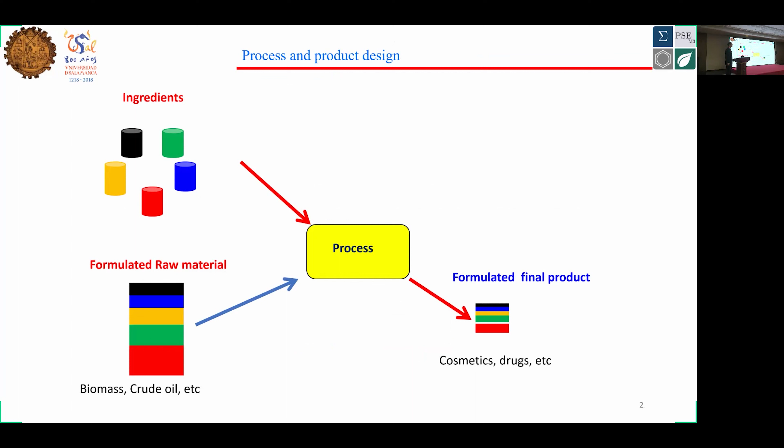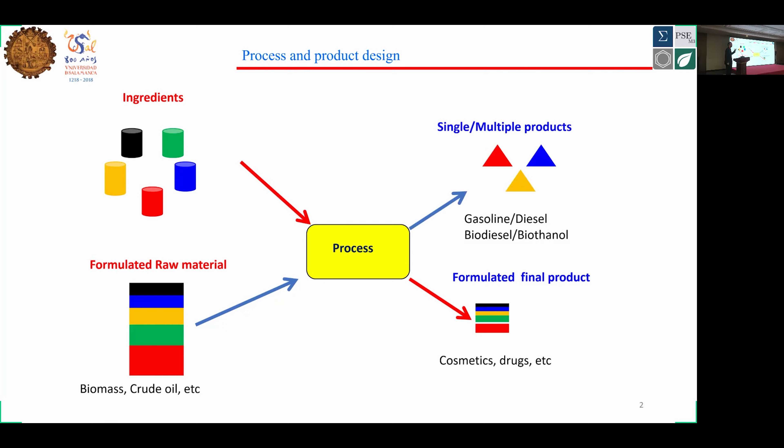Basically, we can talk about two different kinds of products. One is made from mixing a number of ingredients, that's basically what you have anytime you buy shampoo, a perfume, or cosmetics. Or thinking reversely, you have biomass, you have crude, which is made of a number of ingredients, and in the end we are going to separate them to get final products.

So we are going to present three cases, three examples, for these different formulated products. The first one, the formulated product is biomass. We are going to see how we can design the biomass depending on the final products or even the cost of the market of those products. The second example is a little bit more related to energy: the selection of a heat transfer fluid for the operation of an organic Rankine cycle.

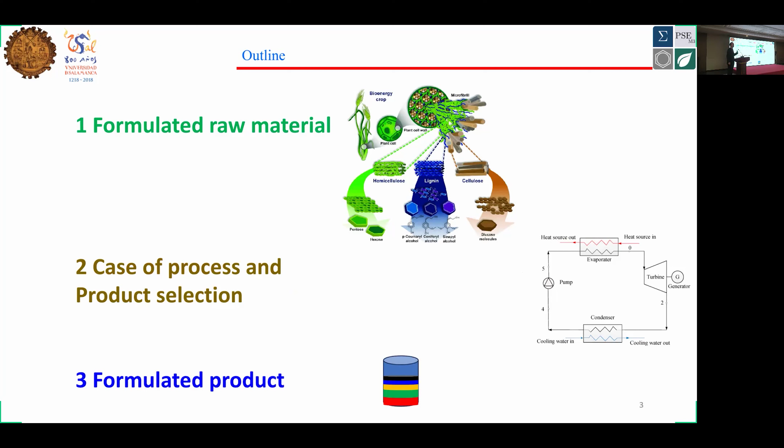The third one is a formulated product made by mixing a number of ingredients, and it is where the supply chain is going to be considered. This first example is related to a biorefinery. The idea is biomasses are made of a number of ingredients like cellulose, hemicellulose, lignin. If we talk about algae, we have lipids, carbohydrates, and so on.

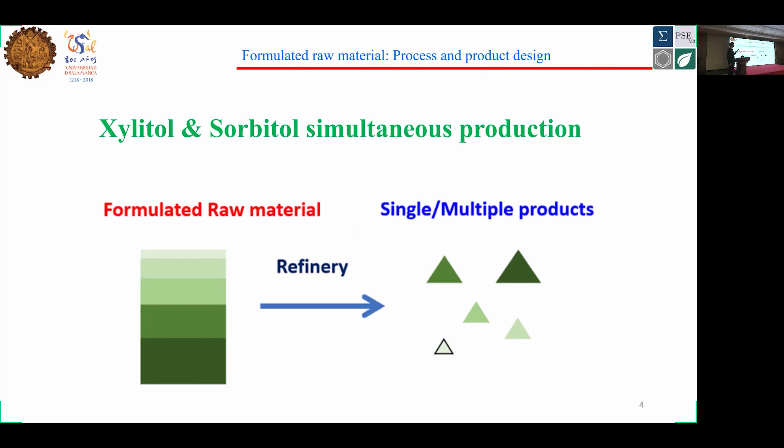We are going to separate them. For this particular case, we have two different products, xylitol and sorbitol, and the price in the market is different. While xylitol comes from C5 sugars, sorbitol comes from C6 sugars. So, on the one hand, we have to select the technologies to process the biomass—pretreatment, fermentation, or catalysis for the synthesis and purification—and on the other hand, we can play with the composition of the biomass.

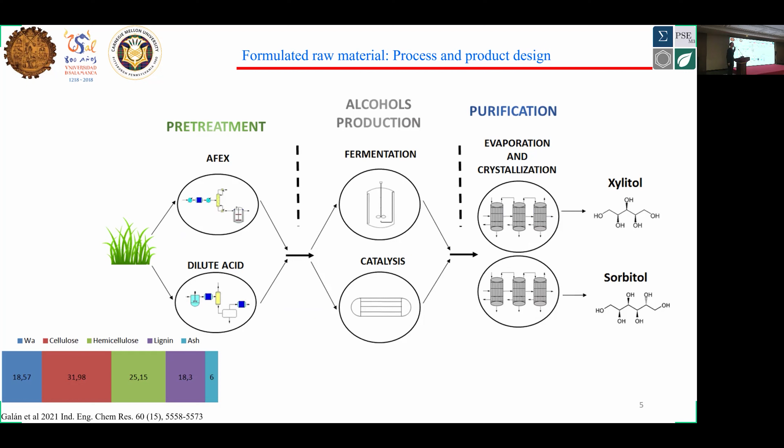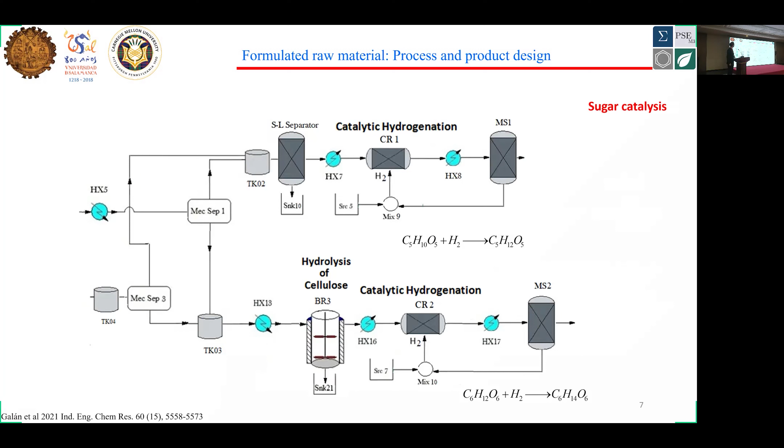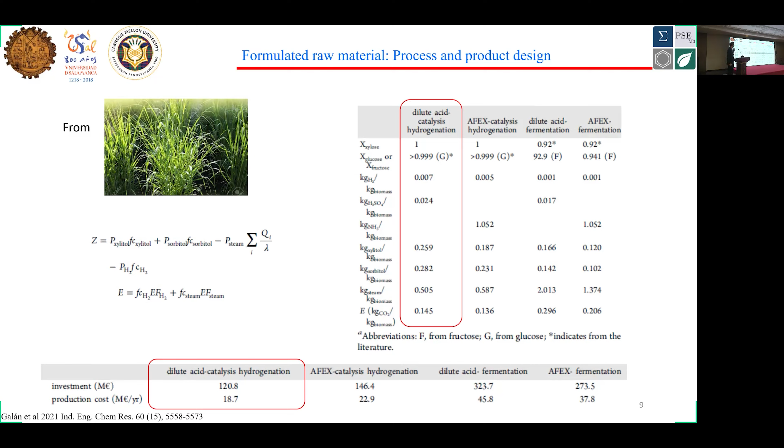So the idea is that first, in process design, we are going to select the technologies, and for that we basically solve this superstructure, and we see that dilute acid followed by catalytic hydrogenation is the best one. But the thing is that you have a number of waste biomasses available—residues from the forest, residues from harvesting, and so on.

The first problem can be to minimize the production cost of that facility. For that, depending on the initial biomass, depending on the raw material and so on, you find different costs. The best one turned out to be corn stover.

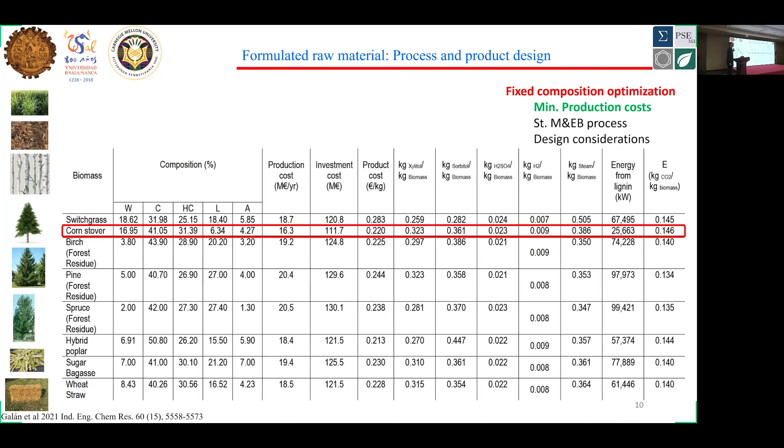We can think of the problem differently. Because of the different price of xylitol and sorbitol, we can have a biomass that we engineer for the composition—xylitol is more expensive than sorbitol. If we optimize the profit, we get a biomass that requires around 40% hemicellulose.

That biomass—the closest that we can find is something like sargassum algae. You see that the production cost is closer to switchgrass, but a little higher than corn stover. So basically that biomass maybe cannot be produced. That's why we try to find something available in nature, but otherwise we can try to engineer one with 40% cellulose, hemicellulose, 20% cellulose.

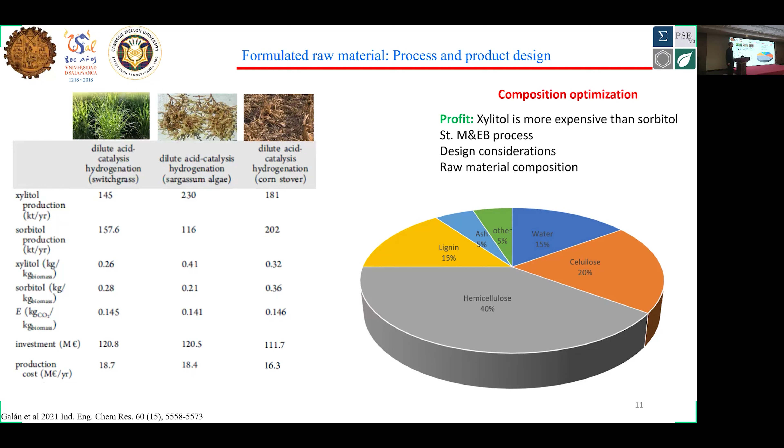Another example is related to the selection of heat transfer fluid. Basically here, the problem that we have is these fluids are toxic and flammable, and also depending on the thermodynamics, they generate more or less power.

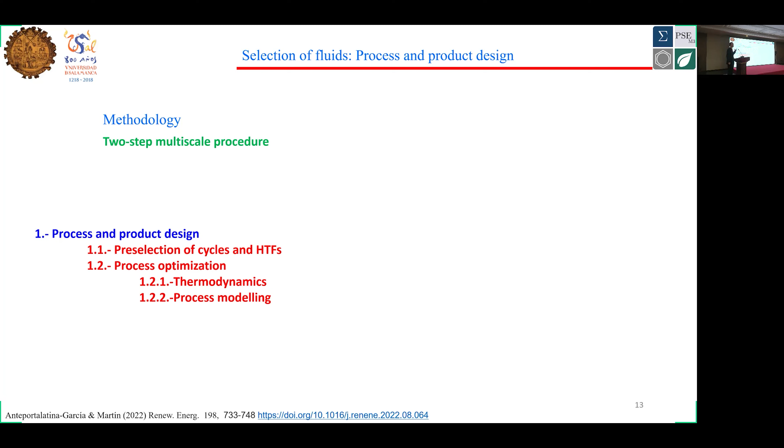So we develop and propose a two-step methodology. The first one, because of the number of heat transfer fluids that can be used, is kind of a pre-screening. The pre-screening will somehow reduce the number of alternatives in terms of fluids and in terms of cycles. The cycles depend on the layout and the type—we'll see the example later. We can also select the type of facility depending on the availability of the resource.

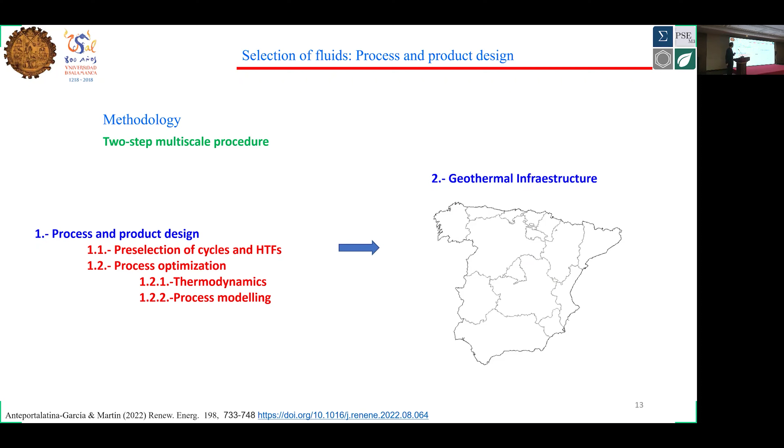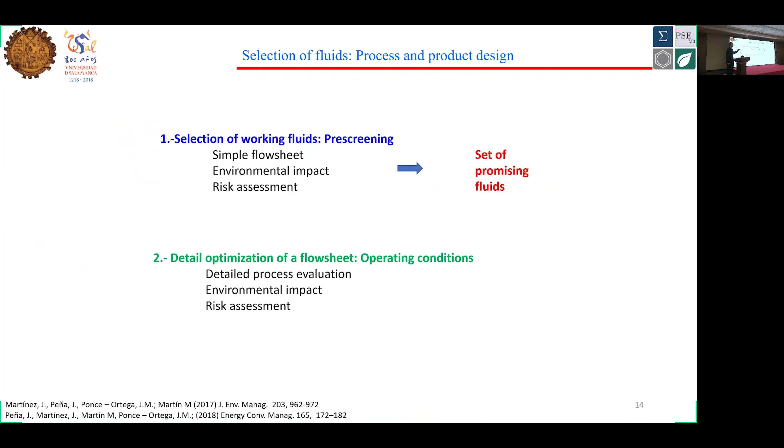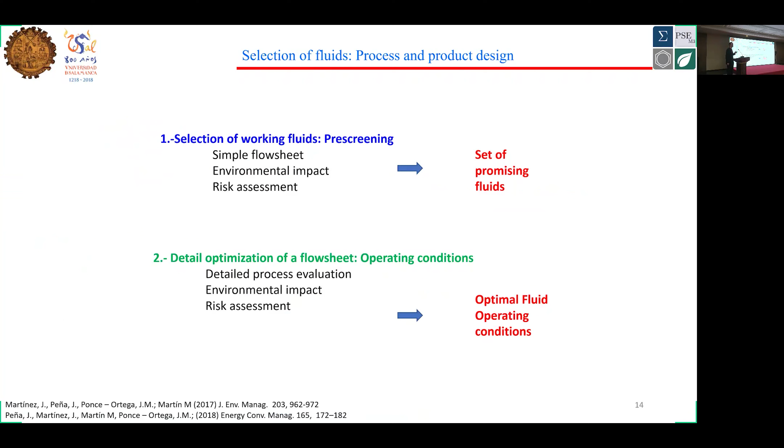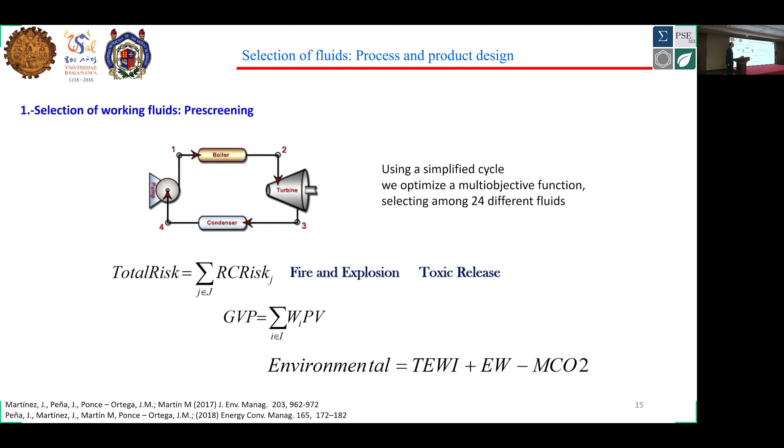The first stage is pre-screening, using a simple flow sheet that considers risk assessment and environmental impact to screen possible fluids. With that, we go for a more detailed optimization, again considering environmental safety and economics in order to select the layout, the type of fluid, and the operating conditions of all the units. The first stage uses a very simple flow sheet, but still considers the three terms in the objective function.

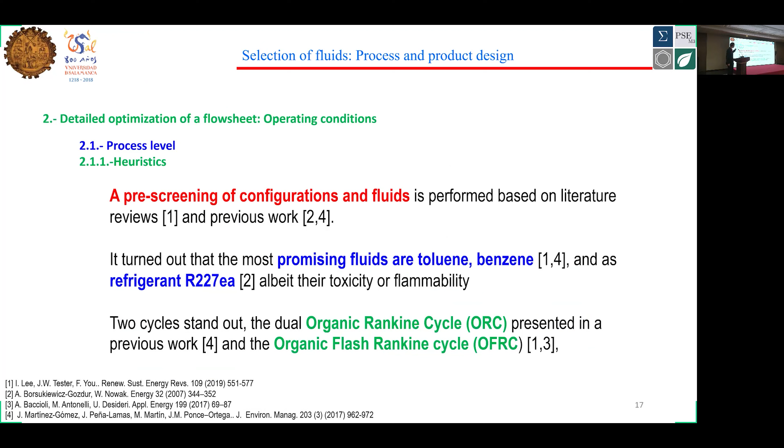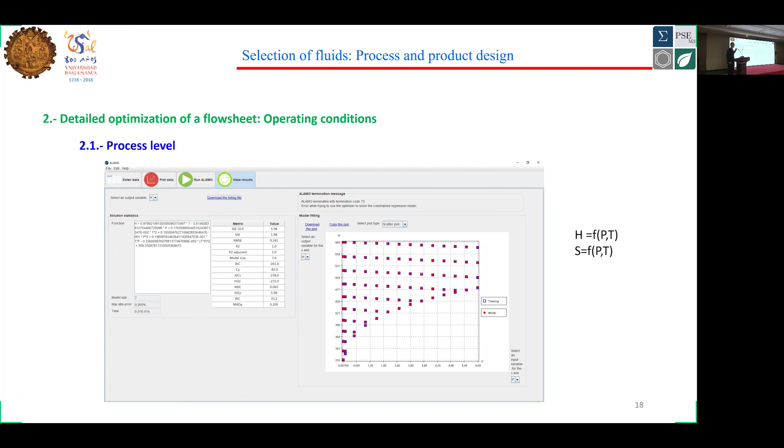For that we use ALAMO in this case to obtain correlations for the enthalpy and entropy for each one of the fluids. As I mentioned before, each one of the Rankine cycles has a different structure. In the case of the organic Rankine cycle, we consider the possibility of two pressure levels. It can be only one, but that's part of the optimization to be selected, along with the operating conditions, pressures and temperatures across the flow sheet.

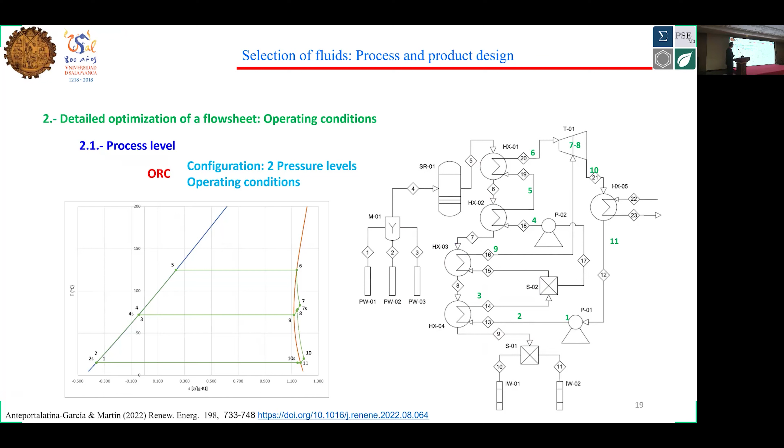The second one is the organic flash Rankine cycle. We have two different configurations, and it can be only one, but that's for the optimization to decide. We apply it first for geothermal, but it can also be applied to any hot waste residue, liquid and gas. The difference in cost and prices depends basically on the area of the heat exchangers. If you work with gases, the heat transfer is poor, and as a result the areas are higher and the heat exchangers more expensive.

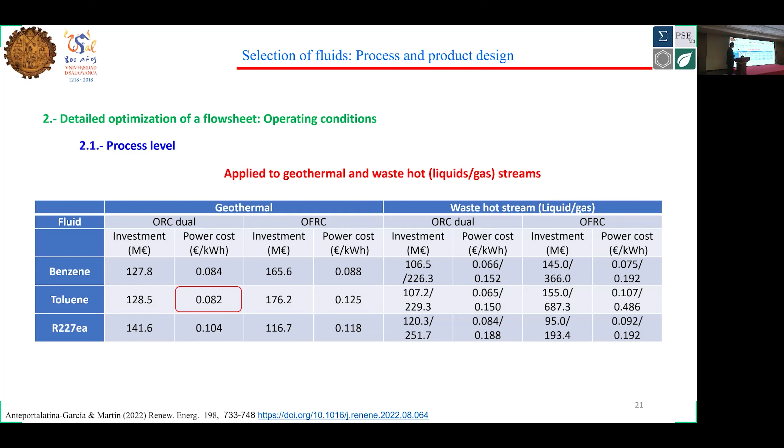So one of the things that affects this, in the case of geothermal, is related to the temperature of the source, and how that affects the selection of the fluid and the selection of the cycle.

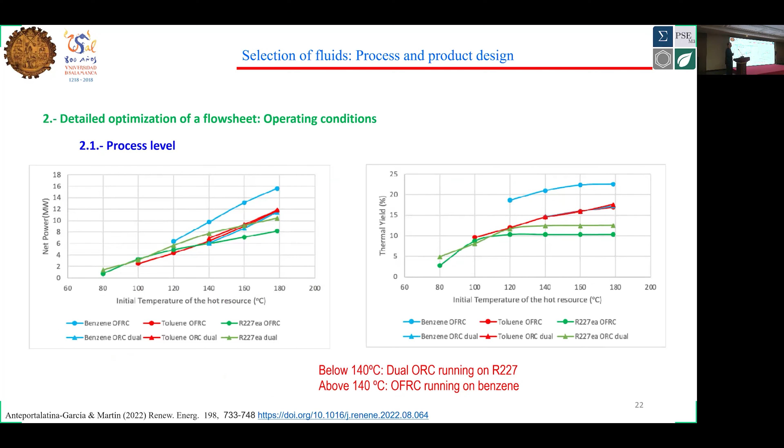Here you see some of the figures, because we are going to be using these figures to select which kind of facility depending on the depth and the temperature of the resource.

You see in places like Salamanca, where I'm from, Madrid, Barcelona — you probably know these other two cities better — depending on the temperature and the type of the resource, in Madrid you are targeting an organic flash Rankine cycle because of the 140 degrees C. If you go to another temperature, 120, close to Barcelona for instance, you go to the other configuration.

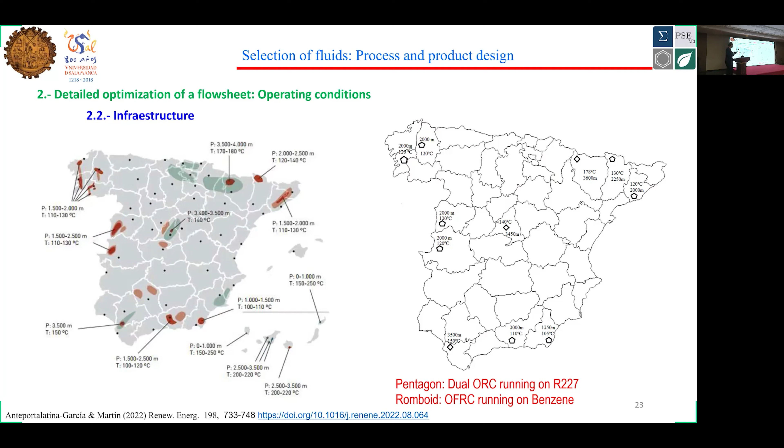Each configuration selects the proper fluid. Now for the final example — I think I'm running over time because this is the longest one — we are going to be integrating all the way from process to supply chain.

Basically, what happens with blending? Blending means that we are going to take ingredients that are made by different companies at different places, and we are going to mix them. They have to be processed, so we have engineering constraints for that.

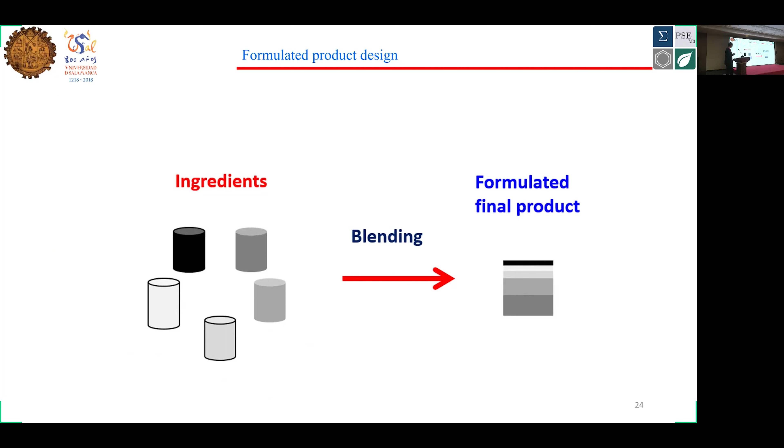Basically this is the kind of problem: on one hand, we have to, or we can, design the ingredient. That's part of the work that Professor Gani has been doing for years. Once we have the ingredients, we are going to mix them — that's the kind of plan. We are going to present the example of a detergent, basically because it's the one we've been working on.

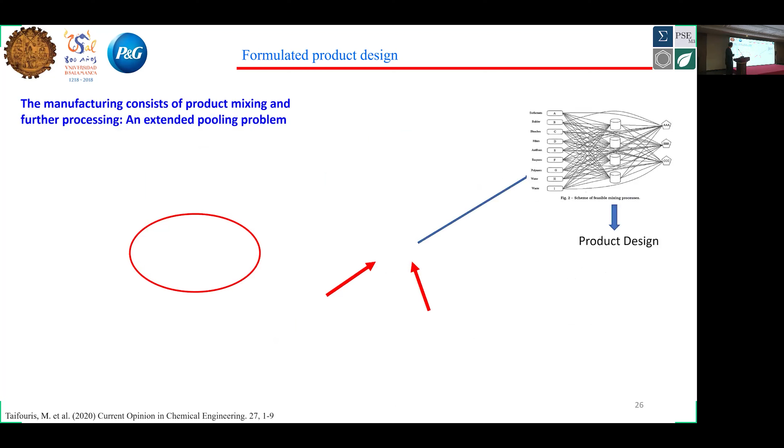Mixing is basically a pooling problem. So the core of the problem is going to be an extended pooling problem, to consider the mixing and process constraints and so on. But we have to integrate that pooling problem within a supply chain, because in the end you are going to buy those ingredients from different companies producing them.

So let's start with this particular case. First, we are going to look for ingredients that have the proper properties for our final product. How can we do this?

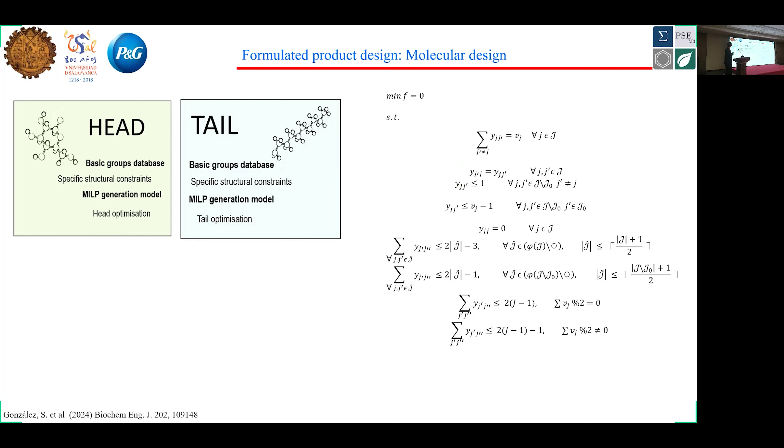Actually, this is on one hand a molecular design problem, combining molecular design with synthesis. First, we have to select which is the molecule — this is the work currently being done by one of my PhD students. We are going to design the head and the tail and impose the conditions for the surfactant. We need, of course, a prediction model for the behavior and properties of that surfactant.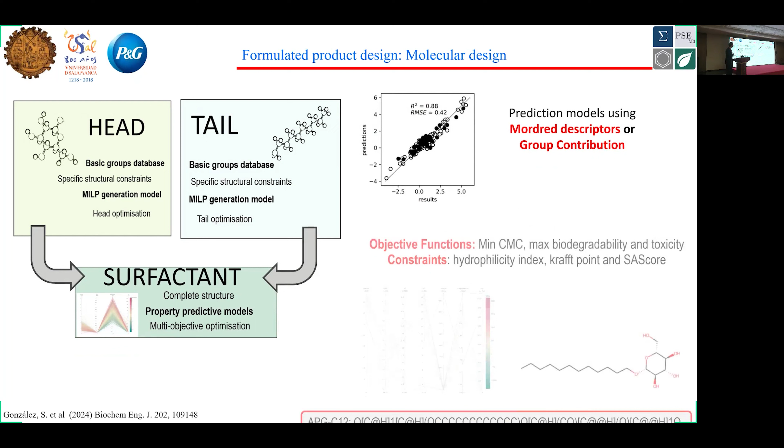Once we come up with that, we have to synthesize, and we are also looking for surfactants that are biodegradable, or that come from ingredients other than crude oil.

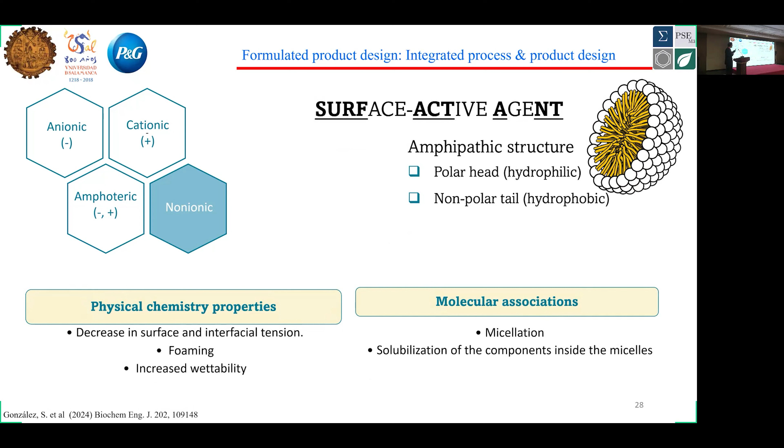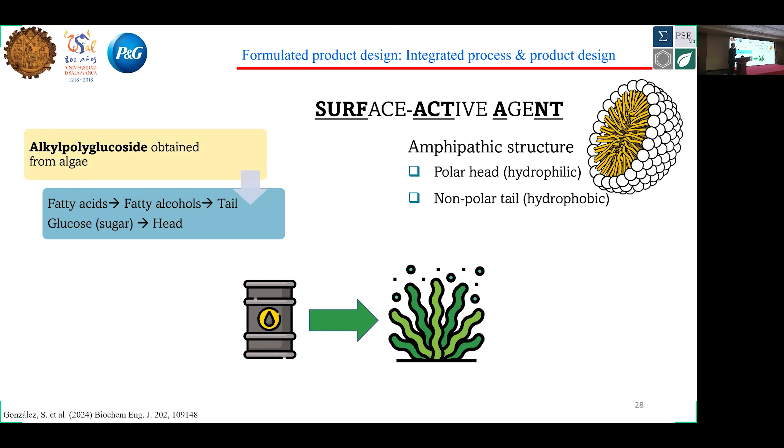In this case, we are going to target APG, which was one of the ones selected. APG is a surfactant that can be produced from algae, but we want to develop a process that is integrated, in the sense that we can produce all the ingredients, the tail and the head of the surfactant, from renewable resources. The head comes basically from sugars, the tail from oil. We can do that from the algae. Again, a product design problem.

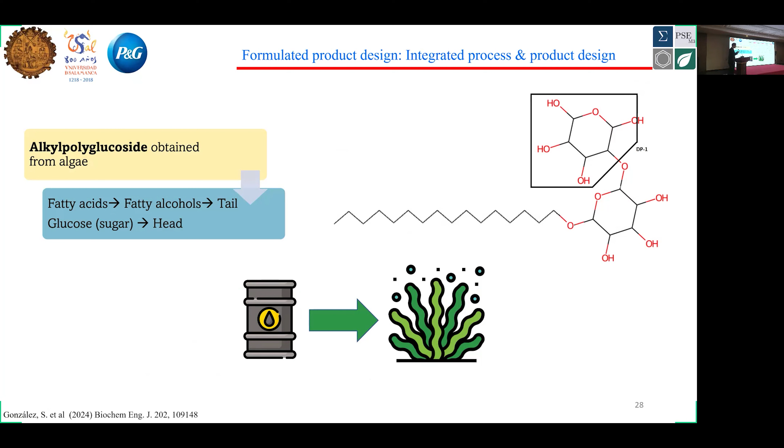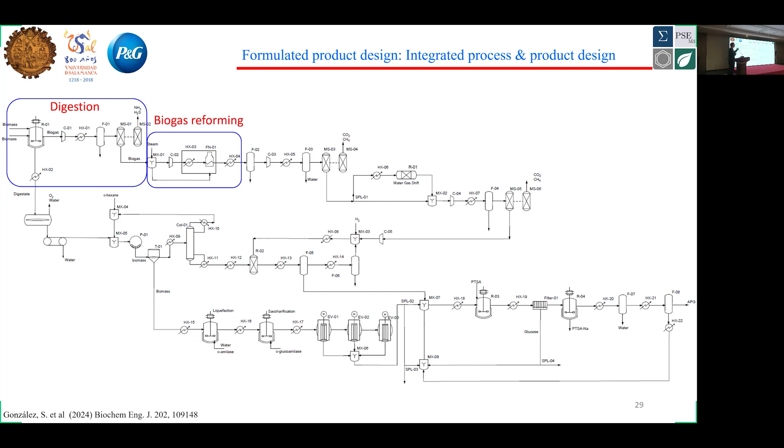In this case, the product to be designed is the algae, the composition of the algae. This is the process that allows us to do that. We have digestion of waste. The digestion generates biogas, which is going to be used to produce hydrogen. On the other hand, the digestion also produces nutrients, which are going to be used to grow the algae together with CO2.

With that, we separate the lipids and the carbohydrates. The lipids are going to be hydrogenated to produce the alcohol that is needed. On the other hand, we have the carbohydrates, the sugars. We are going to break down the sugars to produce glucose and fructose, and the sugar plus the alcohol, we get the APG. So we've designed the molecule.

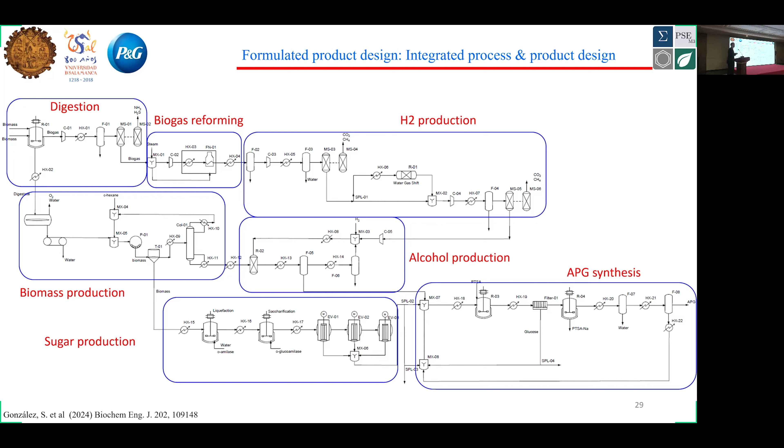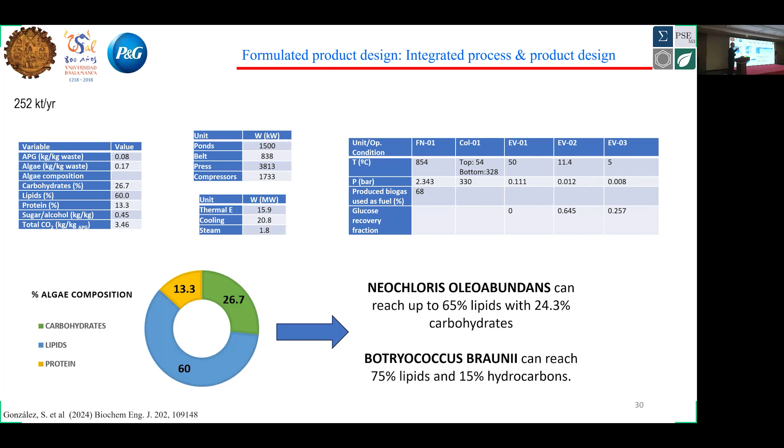Now we evaluate the production. We have a new molecule that is possible to be synthesized and produced from a sustainable resource. This is our molecule, this is the algae design problem. An algae that is basically we target 60% lipid, 27% carbohydrates for our APG product to be produced out of that, and for it to be competitive.

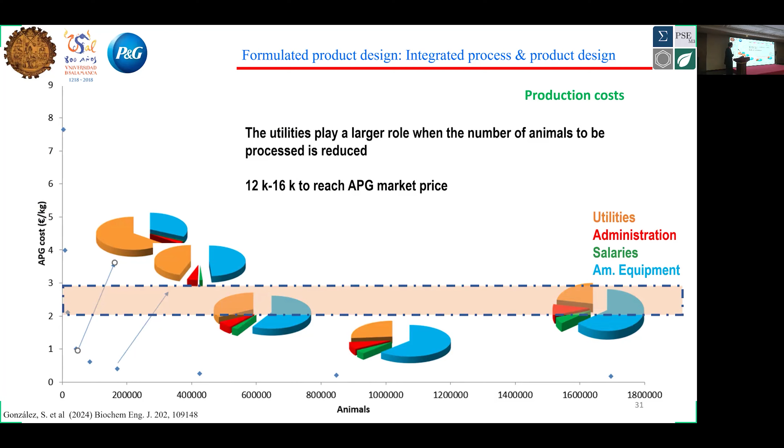The market price is there. So basically what we are trying to do is to evaluate how much waste we need to collect in order for this production process to be competitive with the current production. This is just basically how much of the waste has to be collected. Basically, in most of the provinces in Spain with a large or medium cattle community, we can obtain that.

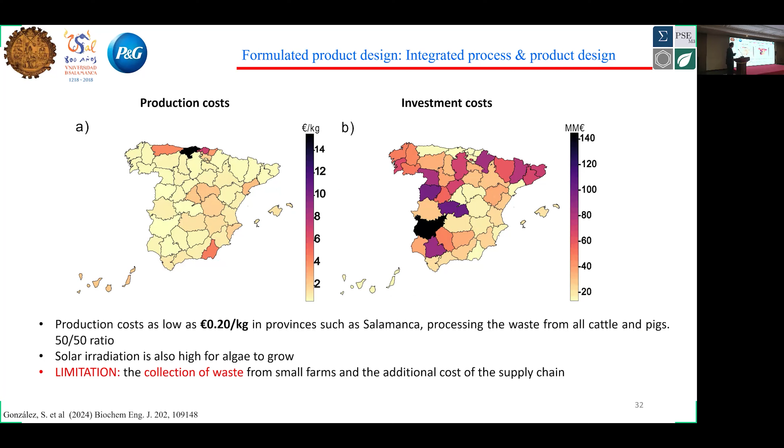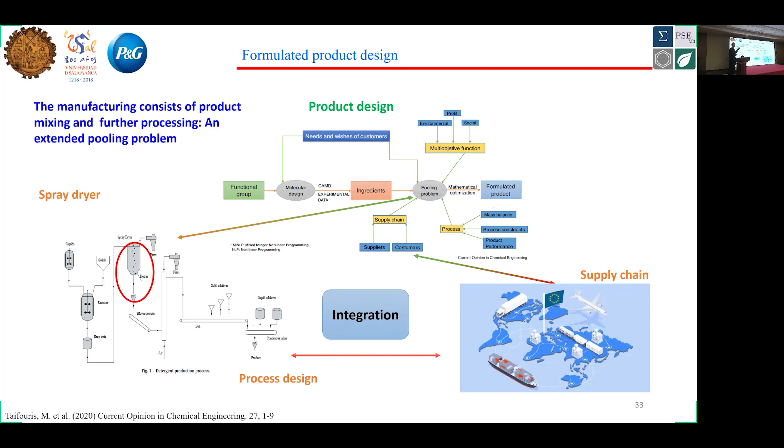Once we have the ingredients, that was just one example to get one of the ingredients. Of course, apart from surfactant, you have also antifoam, enzymes and so on. You are going to formulate the pooling problem. Before the pooling problem, it is also related to how we are going to process that mixture. That mixture has to be dry, and one of the big issues is designing this apparatus.

Actually, this is a spray dryer. I have a couple of very good friends working here in China, in P&G China, Beijing. They were both postdocs with me at Newcastle, and they were also working on that dryer. So basically the problem here is you have to produce the particle that is from 0.4 to 0.5 millimeters, because that's the proper size for your detergent the moment you take a piece.

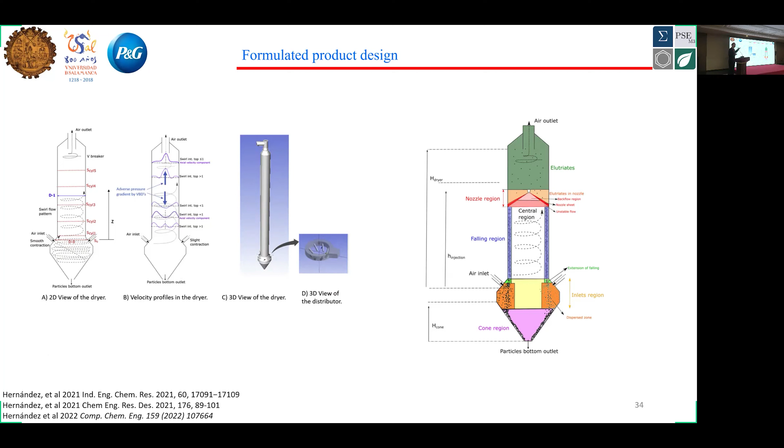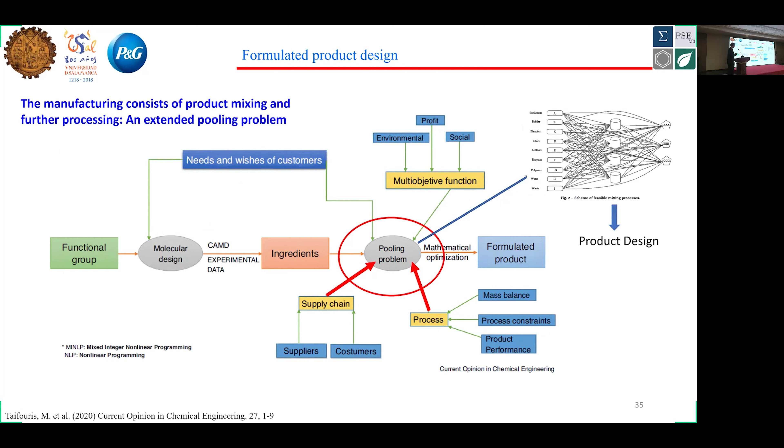So basically that's obtained because of the ingredients. The ingredients affect the particle size and also the properties, the drying, the operating conditions for that particle to grow. With that, we obtain basically process constraints for our pooling problem. That particle size that I mentioned before comes from the study of this unit.

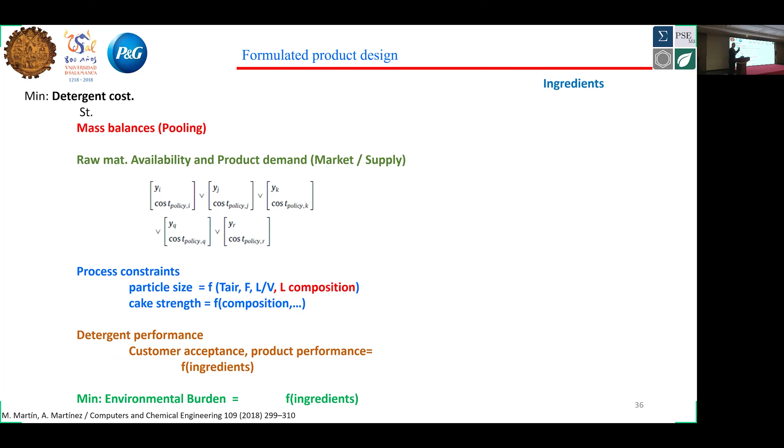The pooling problem actually is something that most of you are familiar with. The only thing here is that we have to also consider product properties or policy properties for the cost. If you buy a large amount, you get a discount. There are different laws for that. You have the process constraints also related to the drying stage before.

You have the detergent performance, basically how your mixture is going to clean your clothes, for instance, and also lately it's very important to include the environmental burden of your detergent. That's the reason why we were also producing ingredients that were more sustainable than the ones coming from crude, or at least biodegradable compared to the ones coming from crude.

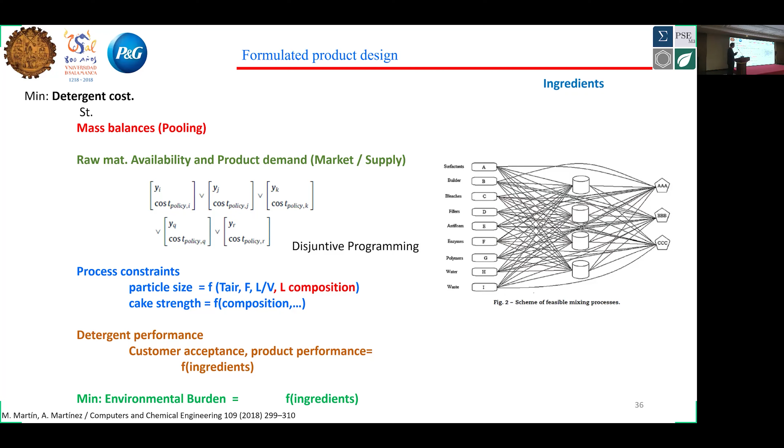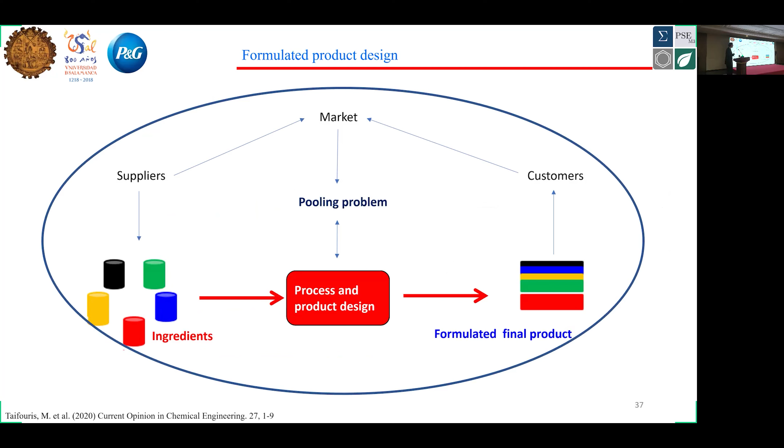So we formulate this problem, but on top of that, using that pooling problem as the core, we consider also the suppliers, the different companies that are producing the surfactants, the antifoam, etc., and the consumers. This is a very large MINLP problem. If it's a regular pooling problem, you target global optimization. We didn't do that, it was too large for us. But even to solve it, if you apply it to an industrially relevant size problem, it's difficult.

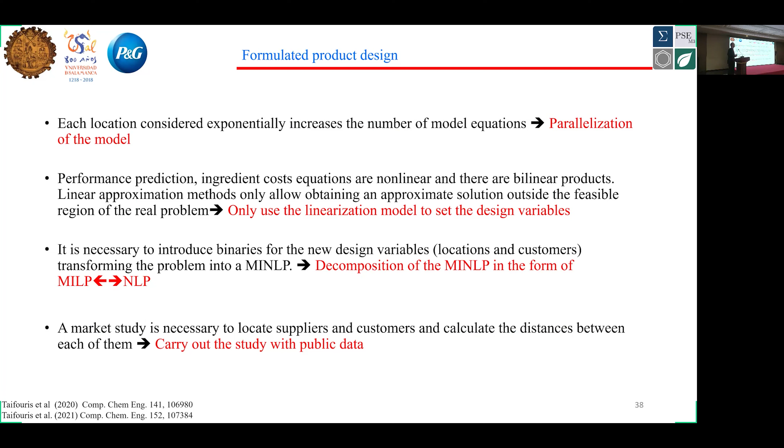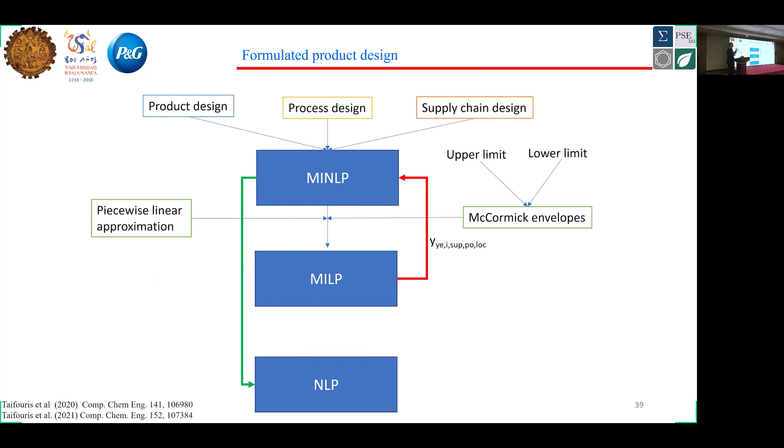The example we were targeting was Europe, and you will see more than 3 million equations. For that, we developed an algorithm, a decomposition algorithm, basically similar to outer approximation. The only thing is we were kind of targeting which kind of approximations were done. One of the good things here is because we know the product, we know the ingredients, we were evaluating also which are the compositions for that.

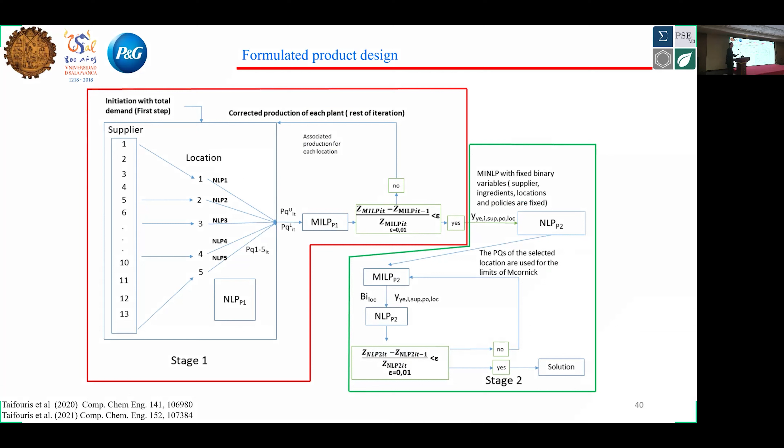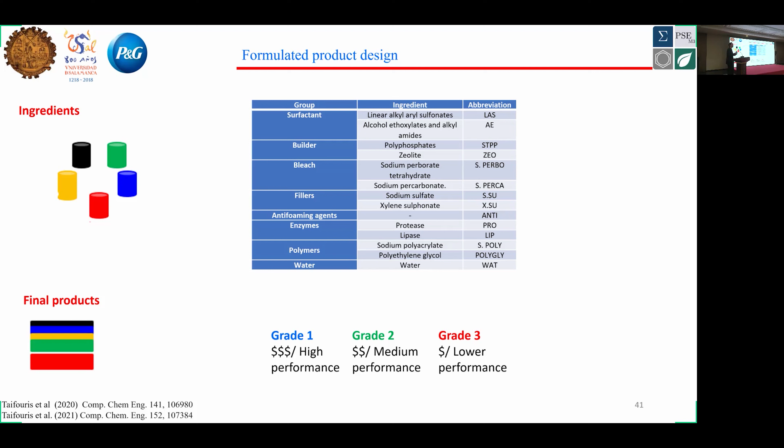This is a case study with real surfactants, real builders and bleaches, but that's not the one the company is solving. The size of the problem is similar. We use 14 different ingredients, 2 surfactants, 2 builders, bleaches, and we consider 3 different final products: one which is the best brand they produce, one which is medium, a little lower, to see where we are going to be producing each one.

And we target the entire Western Europe. Basically, the customers are the big supermarkets - the typical ones are Sainsbury's and Tesco in the UK, Carrefour in France, Mercadona in Spain, something like that. So they are actual real ones.

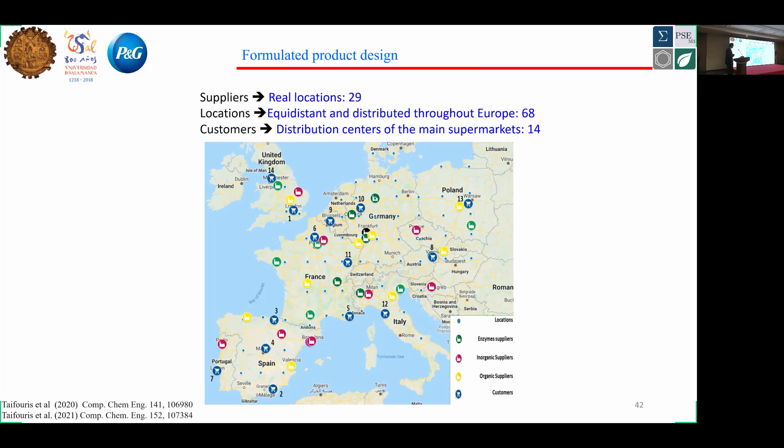We have real suppliers for the organic suppliers, enzymatic enzyme suppliers and inorganic across Europe, like BASF, Monsanto, the location of those facilities, and we pre-selected 68 possible locations for our facilities to be located - those blue points that you can see around the map.

We optimize the full thing using the decomposition algorithm I presented in the previous slide, and we see basically three regions of influence: a central region in Europe covered by a facility actually located in France, targeting all three products. The only difference is that depending on the market around the area, it's going to target or focus more on the production of one of the three.

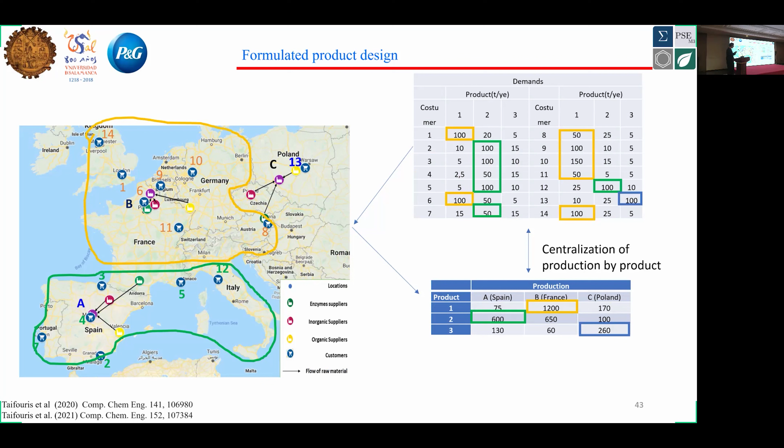Another one will be located in southern Europe for the region of Italy, south of France, Spain, Portugal, and so on. And the third one is targeting the Eastern European part, like Poland, Czech Republic, Hungary, and so on.

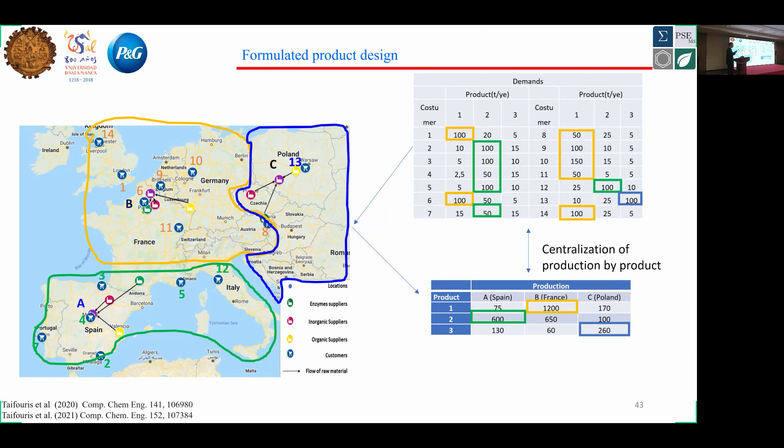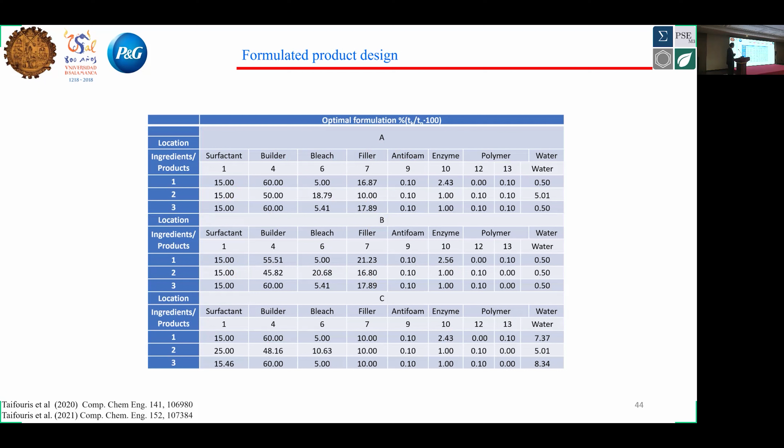Apart from the location, we also get the composition of the detergents. Each detergent - you will see that detergent 1, 2, and 3, even though it's supposed to be the same - what we have is a range of composition for each one of them. In most cases it's similar, but there are some small differences in some of the ingredients.

So with this, we have more or less good timing. We've been presenting three different cases as examples for formulated products. A formulated product is not only the product that you sell - a formulated product can also be the ingredient or the raw material.

In terms of raw material, we're talking about biomass - two cases, the lignocellulosic, but also the algae, as part of the last example. In terms of the biorefinery problems, how we can design the raw material or select it, that includes modeling the entire flow sheet. We have to consider all the operations to determine which is the composition of our raw material for the final product to be better produced.

Another different area is related to the heat transfer fluid. This is particularly important to consider the thermodynamics, because actually it's the one that determines the power that is going to get out of the flow sheet. As a result, it involves developing proper correlations for the thermodynamic properties to be embedded in the optimization.

The last example is basically anything related to the consumer product that we use every day. Even though the core is an extended pooling problem, we have to add process, we have to add supply, and that complicates things. The problem is relatively big - I mentioned 3 million equations, 1.5 million continuous variables, and I think 50 or 70,000 binaries, and so on.